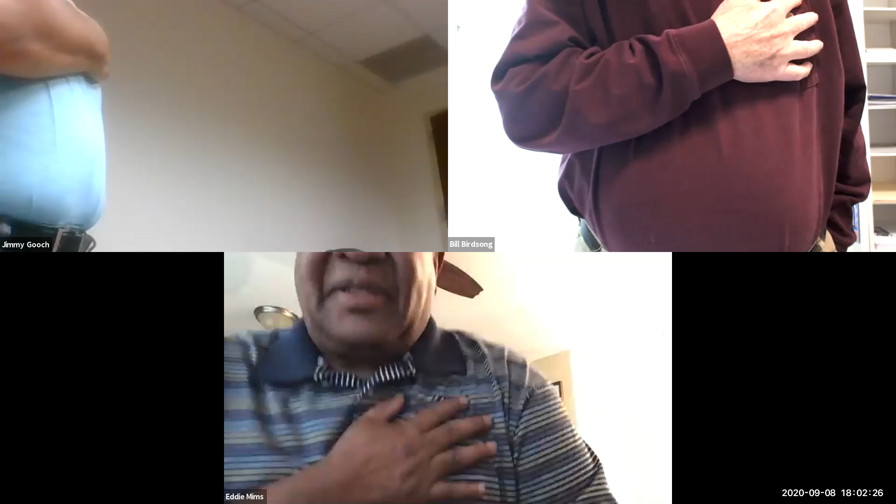Amen. Thank you. And Mr. Birdsong, will you lead us in the Pledge of Allegiance? Be glad to. Please join me in the pledge. I pledge allegiance to the flag of the United States of America and to the republic for which it stands, one nation, under God, indivisible, with liberty and justice for all.

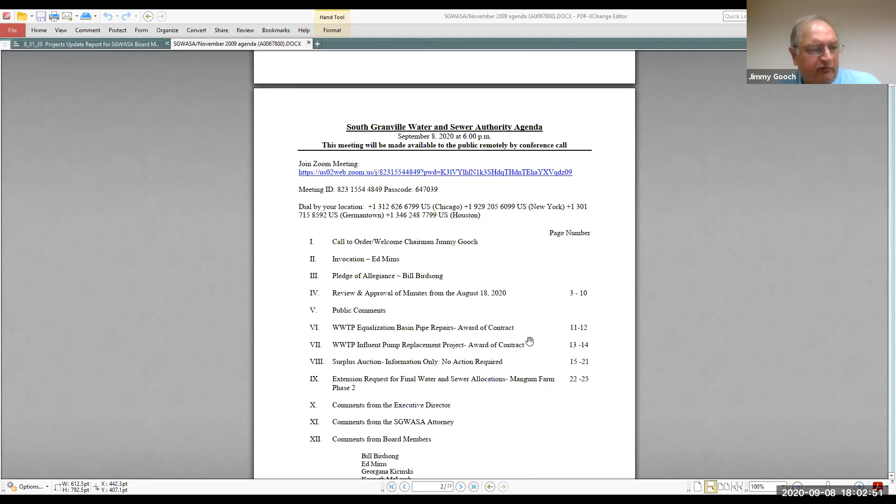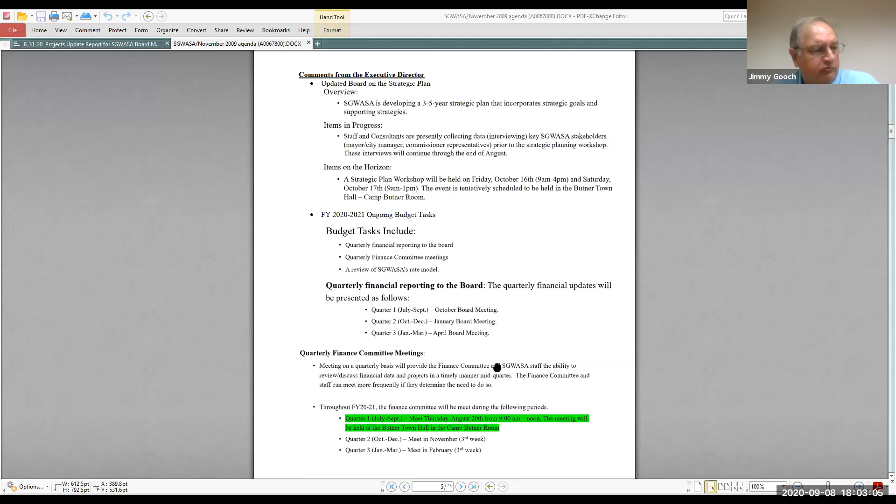Thank you. And now our next item of business is review and approval of minutes from the August 18th meeting. Do I hear any comments? I make a motion that we approve the minutes from the August 18th meeting. We have a motion from Commissioner Kicinski to approve it. Second. I'll second. Okay, we have two seconds. Mr. Birdsong chimed in first, so we have a second from Mr. Birdsong. And Ms. Mercer, will you do a roll call vote for us, please?

Yes. Chairman Jimmy Gooch, yes. Mr. Bill Birdsong, approved. Mr. Ed Mims, aye. Ms. Georgeana Kicinski, aye. Mr. Tim Karen, aye. And I think that's all that's present. Yes, thank you. So the motion carries.

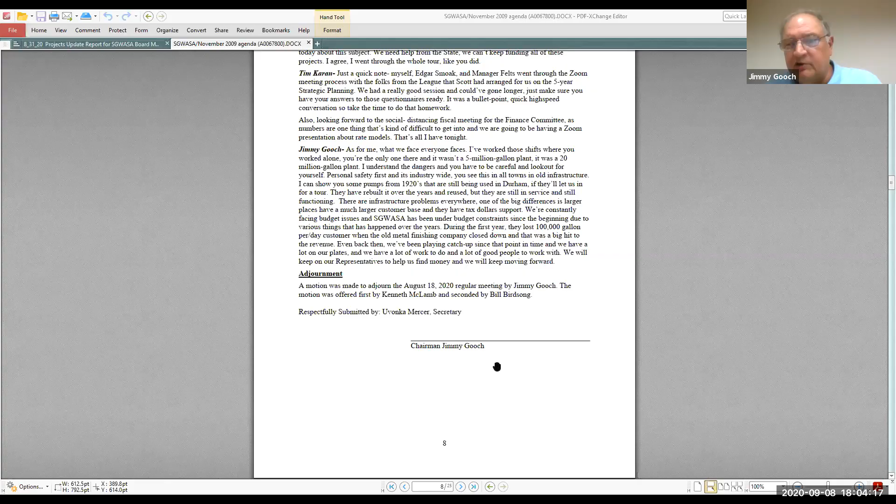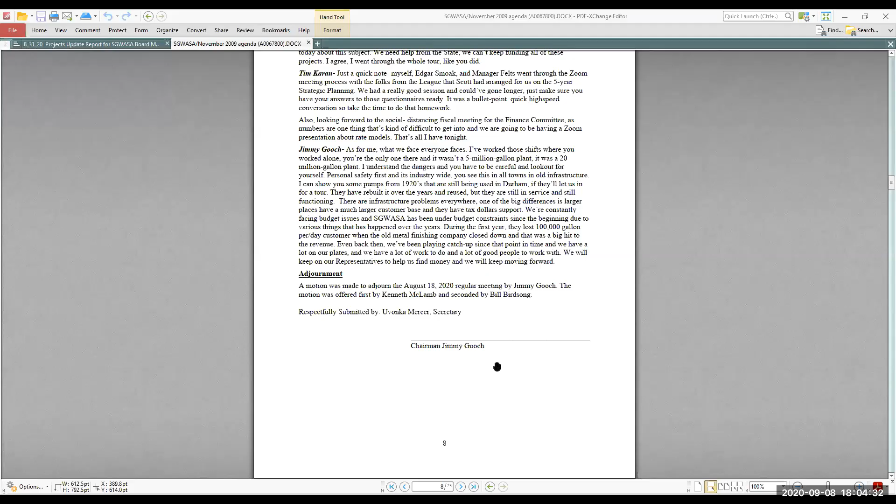Mr. Kenneth McLamb is here now, but I did not hear what we were voting on. We were voting on approval of the minutes from the August 18th meeting. I agree. Okay, thank you. I'm glad you could join us. Thank you. I understand you're still at work, so. I'm on my phone, but I can listen. Okay, good deal. Thank you, Kenneth. We appreciate that.

And now we'll open the floor for public comments for anyone that would like to make a comment at this time. Anyone from the public that would like to make a comment, please speak up. Okay, I don't see anyone unmuting their microphone, or any motion to make a public comment. So we'll close public comments and move on to, I'm sorry, did I miss something?

If not, we'll move on to item 6 on our agenda, the wastewater treatment plant equalization basin pipe repairs, the award of contract. Mr. Schroy, could you lead us through this, please? I sure will. Thank you, Mr. Chairman. This is the wastewater treatment plant equalization basin pipe repair project award of contract. So just some background information for you. The South Granville Water and Sewer Authority FY 2021 approved budget includes $234,000 for repairs and maintenance of equipment at the SGWASA wastewater treatment facility.

The focus of this project is on our equalization basins and some pipe repairs within one of the basins. The wastewater treatment facility has two 2.5 million gallon storage tanks on site that are used as flow storage and equalization for wastewater processing at the facility. The equalization basins are designed to provide consistent influent flow to downstream processes by retaining high flow fluctuations.

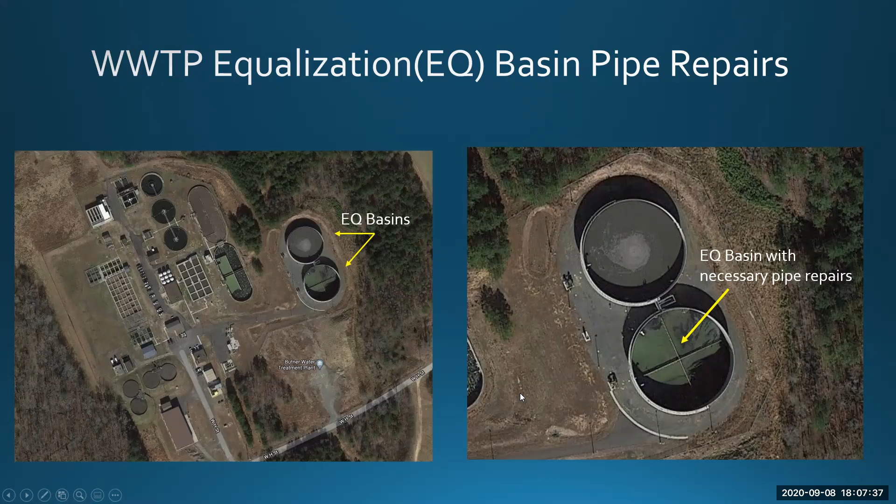So to give you a better snapshot of what's going on here, you can see in this view that inside the containers, we actually have these joint repairs on these pipe segments. And these are the items that need to be repaired throughout the basin. I hope it's very helpful for you to see from these images that what we're focusing on with this contract is repair to get this back into service.

So when procuring items using the informal bid procedures, SGWASA policy requires 3 competitive quotes on a vendor letterhead. And with the estimated cost of $20,000 for the repair work, SGWASA staff solicited informal bids. The following companies provided written proposals on their company letterhead: Fiber Basin Incorporated, proposed cost $14,000. Microfab Incorporated, proposed cost $15,138. And Augusta Fiberglass Incorporated, proposed cost of $16,250.

Following the review of the proposals submitted to SGWASA, SGWASA staff recommends awarding the fiberglass pipe repair project to Fiber Basin Incorporated. Following board approval, the work will commence to be completed within 45 days. In terms of the financials for this project, as mentioned previously, SGWASA's approved budget includes $234,000 for repairs and maintenance of the equipment at the wastewater treatment facility. Presently, $141,900 is available for projects.

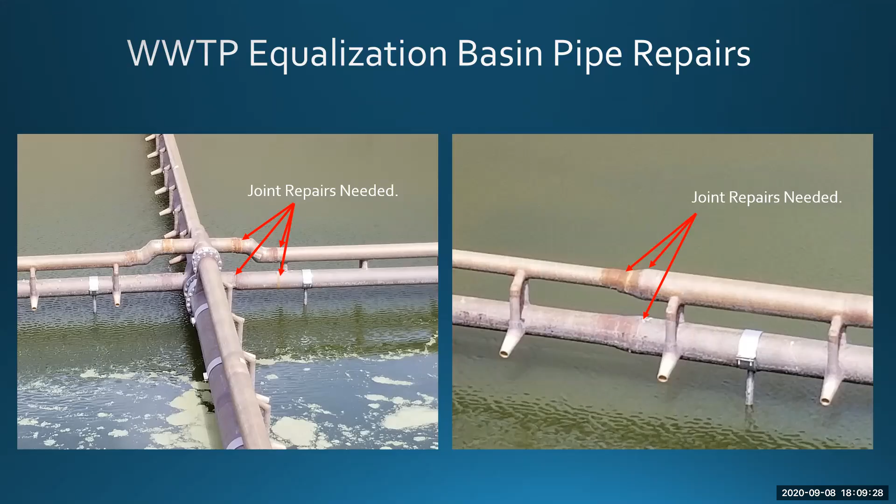As such, SGWASA staff is requesting authority to spend $15,400 on this item, which includes a 10% contingency of $1,400. So my recommendation is the SGWASA board approve the equalization basin pipe repair work to Fiber Basin Incorporated for the not to exceed amount of $15,400. Thank you, Mr. Chairman. Thank you.

Do we have any discussion? If there's no discussion, then do I hear a motion? Mr. Chair? Yes, Mr. Mims? Yes, I move that SGWASA award the equalization basin pipe repair work to Fiber Basin Inc. for the not to exceed amount of $15,400. Thank you for the motion. Is there any discussion on the motion? If not, do I hear a second? Second. Second from Commissioner Kicinski. And Ms. Mercer, will you do a roll call vote for us, please?

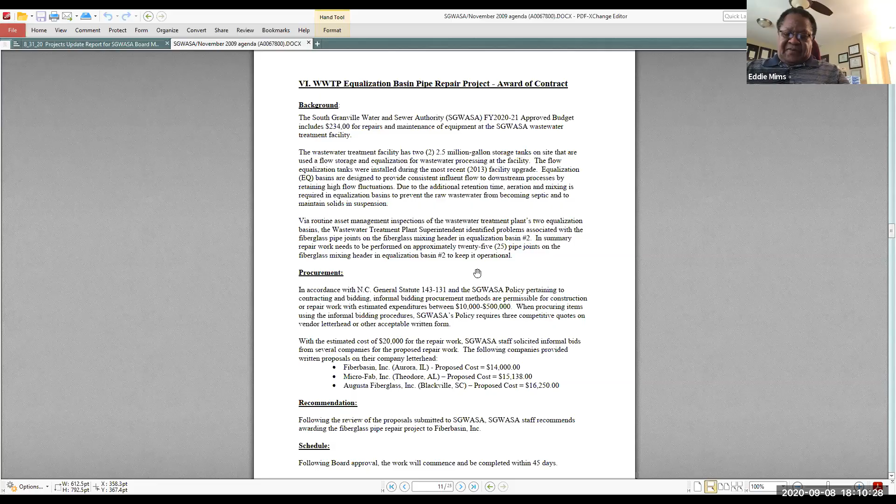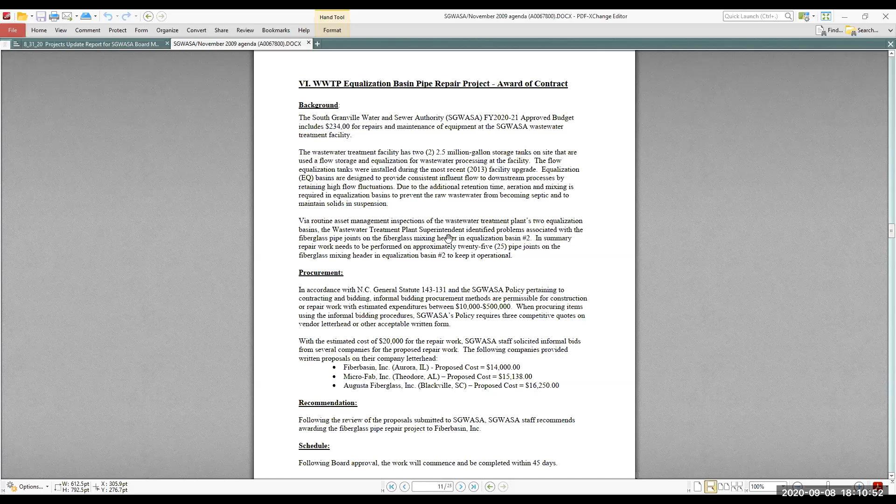Sure. Mr. Ed Mims, aye. Mr. Bill Birdsong, approved. Ms. Georgeana Kicinski, yes. Mr. Kenneth McLeod, yes. Mr. Tim Karen, yes. And Chairman Jimmy Gooch. Yes. So the project is approved, award of the contract rather is approved unanimously. Can't even talk tonight.

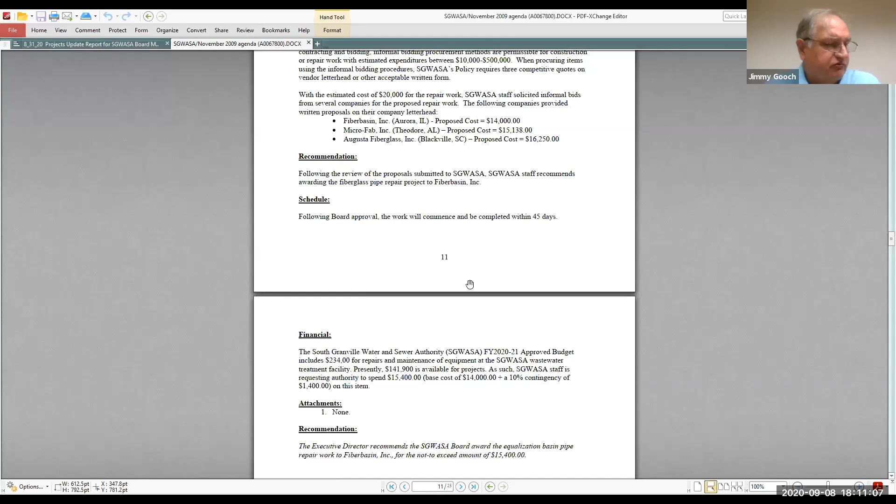And we'll move on to item 7, which is the wastewater treatment plant influent pump replacement project, award of contract on that. Thank you. Mr. Troy, would you lead us through this, please? I sure will. Thank you, Mr. Chairman. The SGWASA FY2020-21 approved budget included $55,000 for the rebuild or purchase of one existing pump in the influent pump station at the South Granville Water and Sewer Authority wastewater treatment facility. The influent pump station includes 3 pumps.

As part of the routine scheduled maintenance that is performed on the existing assets at the wastewater treatment plant, one of the 3 influent pump station pumps was replaced with new last year, fiscal year 2019-20, at a cost of $52,236, while a second pump is scheduled for replacement this fiscal year. In terms of procurement, when procuring items using the informal bidding process, SGWASA's policy requires 3 competitive quotes on vendor letterhead. The new pump type and manufacturer that SGWASA is recommending for purchase comes from a vendor who's identified by SGWASA as a sole source vendor. This was the same for last year's pump purchase.

Therefore, the following sole source company provided SGWASA with a written proposal on their company letterhead for the installation of one new pump, and that was Charles R. Underwood Incorporated, Sanford, North Carolina, proposed cost $53,236. In terms of the recommendations, SGWASA staff recommends the board approve the purchase and installation of the new pump from Charles Underwood Incorporated, the sole source vendor. In terms of our schedule, following board approval, this item will be purchased and installed within the next 60 days.

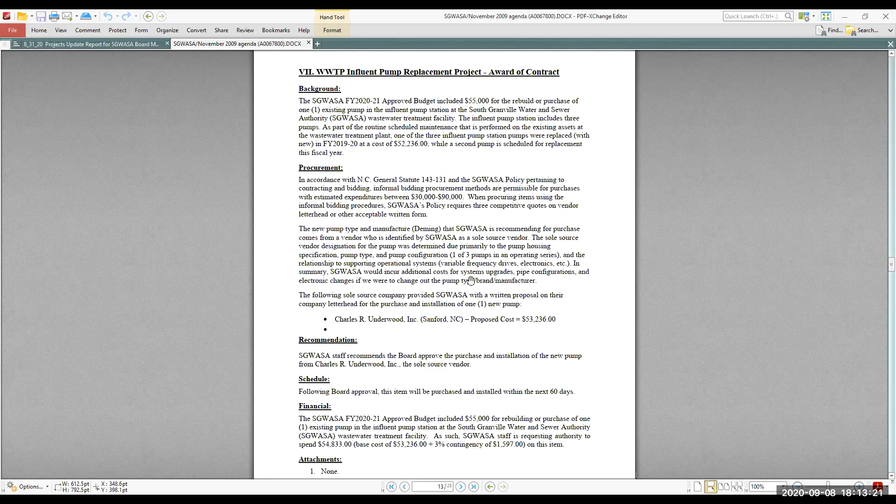Thank you, Mr. Troy. Are there any questions or any comments? No pictures this time? No pictures. Scott, do you know if there's a brand name on that pump? The pump type and manufacturer we're calling out is Deming, D-E-M-I-N-G. Okay, thank you. You're welcome.

Mr. Chair? Yes, please. Yes, Mr. Mayor. Yes, Mr. Troy, I was just curious, since the amount budgeted was $55K, and you asked for something less than that, not much less, but something less than that. I guess your level of confidence that the contingency only needs to be 3% is pretty high. Would you concur with that?

That my contingency is high? Is that correct? Your contingency only needs to be 3%. Yeah, exactly. This company has performed very well for us in the past. And as you can see, there was a slight increase in the price over last year's price for this. And we have a very detailed proposal working with this vendor.

And we always like just a little bit of contingency, if you will, just in case something needs to be done in addition. And that takes us right up to the budget amount without going over. So we're trying to be fiscally responsible as well. And of course, we will not spend that contingency if we do not need it. Thank you, Mr. Chair.

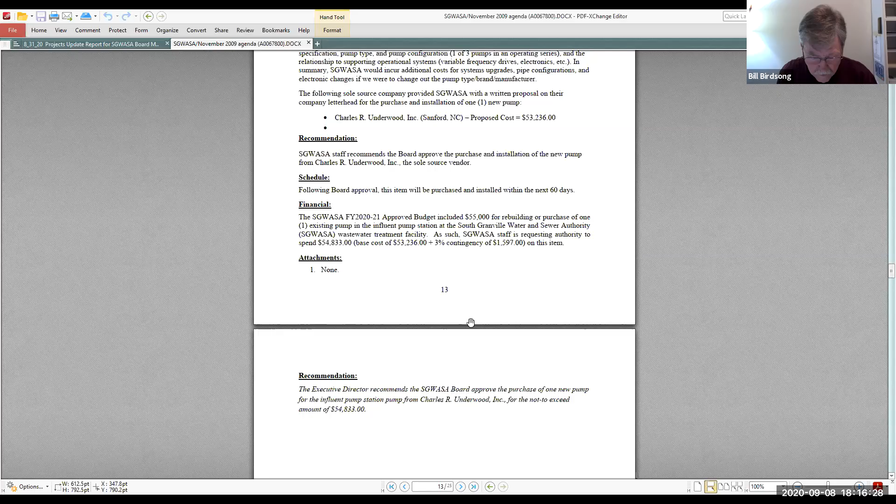Any other questions, comments? If not, do I hear a motion? Yeah, motion to approve. Go ahead. I stated my name, Tim Karen, motion for approval. Okay, Tim slipped in and made the motion then. Do I hear a second? Second. Okay, we have a second from Mr. McLam. So we have a motion and a second.

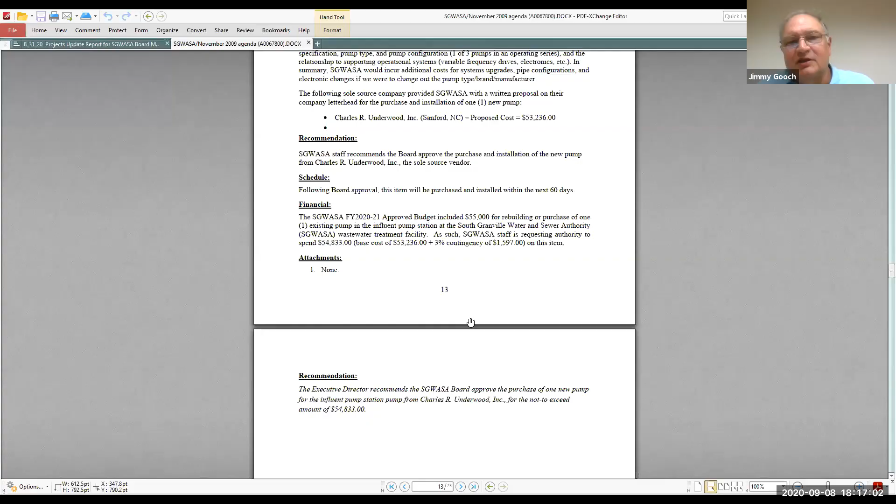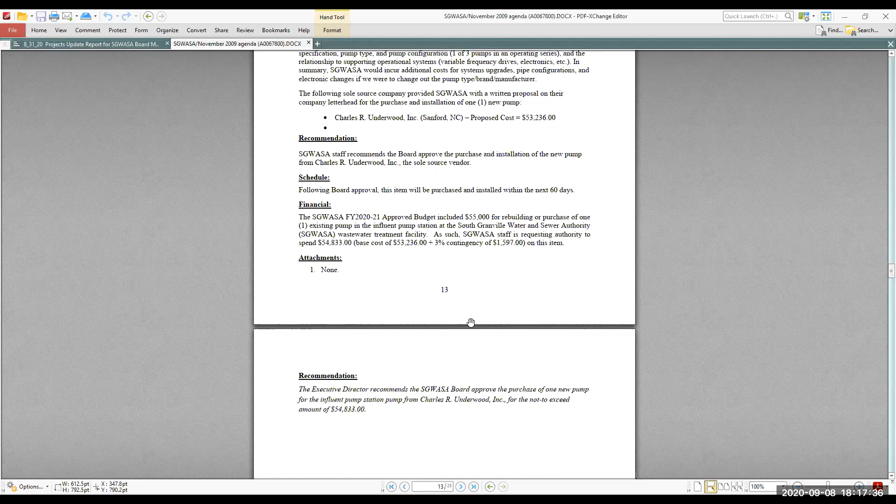Good, Ms. Mercer, will you do a roll call vote for us, please? Sure. Ms. Georgina Kaczynski, yes. Mr. Ed Mims, aye. Mr. Bill Birdsong, approved. Mr. Tim Karen, yes. Mr. Kenneth McLam, yes. And Chairman Jimmy Gooch. Yes. So we have a unanimous vote.

The motion passes. And we move on to item number 8, surplus auction. This is information only, no action required. That is Mr. Troy, correct? Yes, thank you, Mr. Chairman. I'll continue with this item if that's okay. Yes, please. Thank you. So just some background. In 2009, SGWASA Board passed a resolution authorizing the authority to enter into a seller's agreement with GovDeals for disposal of surplus personal property via the vendor's online auction software.

So in accordance with the provisions of the board-approved administrative procedures governing the disposal of property, the executive director has identified several items, vehicles, and other assets that are being declared surplus. The list of the surplus property has been attached to the agenda and is found below. The executive director has determined minimum bid values for all surplus items, and will coordinate with the finance director to schedule a public auction on GovDeals later this fall.

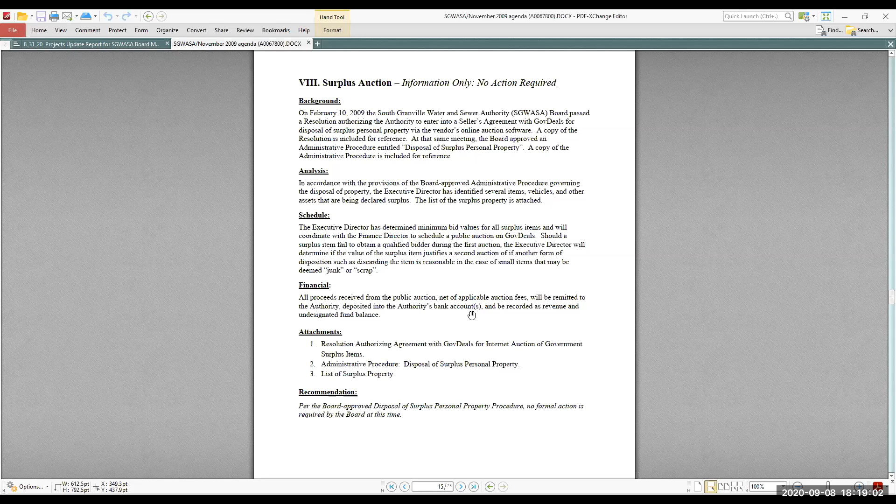All proceeds received from the public auction, net of applicable auction fees, will be remitted to the authority. I've attached for you the original resolution, the administrative procedure, as well as the list of surplus property. And again, per the board-approved disposal of surplus personal property procedure, no formal action is required by the board at this time. Thank you, Mr. Chair. Thank you. Are there any comments or discussion?

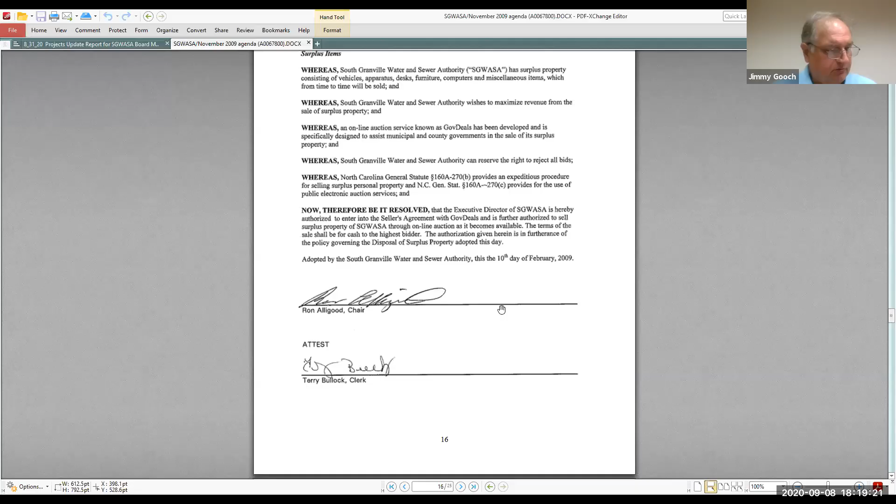If not, we'll move on to item number 9, the extension request for final water and sewer allocations for the Mangum Farm Phase 2. Mr. Troy, will you help us with this, lead us through it? I sure will. Thank you, Mr. Chairman. Okay, a lot of detail in this. So it's worth kind of taking our time just to walk through this as far as the extension request.

So the Mangum Farm subdivision located in Stem was proposed as a 2-phase construction project back in 2006. And it was proposed as a 245 home subdivision. Phase 1 construction was completed and includes 78 homes, whereas Phase 2, proposed at 167 homes, has not been started. In terms of the allocations for water and sewer for this subdivision, the total final allocation approved for the entire subdivision, both phases, is 92,880 gallons per day.

In terms of the status of the total allocations, Phase 1 consumes just over 32,000 gallons per day, which leaves a balance of just over 60,000 gallons per day for Phase 2. At the March 14th, 2017 SGWASA Board meeting, the board approved with conditions a 3-year extension, expiring October 11th, 2020, for the final water and sewer allocations of 60,120 gallons per day of residential water and sewer for the Mangum Farm Subdivision Phase 2 project. The 3-year extension granted by the board on March 14th, 2017 represented the third extension since the original allocation approval in October of 2006.

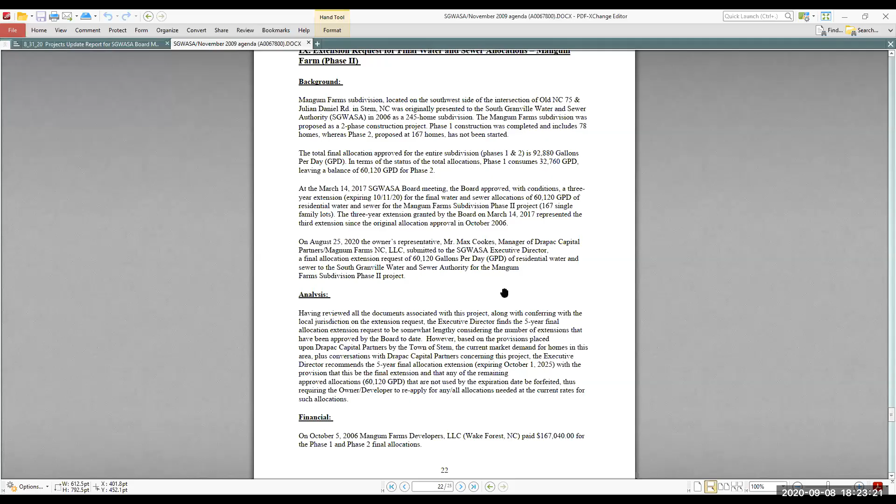Therefore, my recommendation to the board is that the SGWASA board extend the deadline to October 1st, 2025 for the final allocation of 60,120 gallons per day for residential water and sewer for the Mangum Farm Subdivision Phase 2, with the conditions as noted on the letter dated 3/15/17, including the provision that this be the final extension, and that any of the remaining approved allocations not used by the expiration date be forfeited, thus requiring the owner to reapply for any and all allocations needed at the current rates for such allocations.

Thank you, Mr. Chairman. Thank you, Mr. Troy. Do we have any comments or concerns or questions from the board members? Mr. Chairman, I have a question. Yes, Commissioner Kicinski, go right ahead.

So I see that on the document that's in our agenda, item number 9, extension request, it talks about phase 2 having a proposed 167 homes. But in the March 15, 2017 document, it says 165 single-family lots on phase 2. And in the Drapac document from August 25th, 2020, it is for 165 homes. I'd like to know which one is it, 167 or 165? It's the lower amount. Okay, thank you. You're welcome.

Any other questions, comments? Mr. Chair. Yes, Mr. Mims. Yes, I'd just like to ask Board Member McLam, does he see any issues that might impact this subdivision? I do not. The board has approved it. Okay. Thank you. Any other discussion, comments, concerns? If not, do I hear a motion on this? Motion to approve.

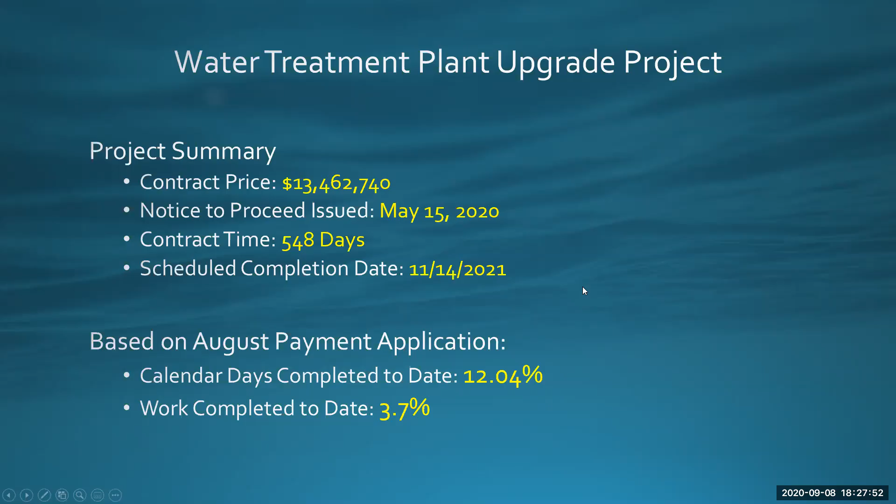Okay, so just an overview. I always like to start off with an overview of the project summary. As you can see, our contracted price is over $13 million. Our notice to proceed was issued in May of this year, and our scheduled completion date is coming up in November of 2021. Based on the August payment application, we've completed about 12% of calendar days, and work completed to date is about 3.7%. I like to keep in mind all the improvements we're doing to the water treatment plant, and as you see, those are highlighted in yellow. And this is a call out just to show you again all the things we're working on in this project.

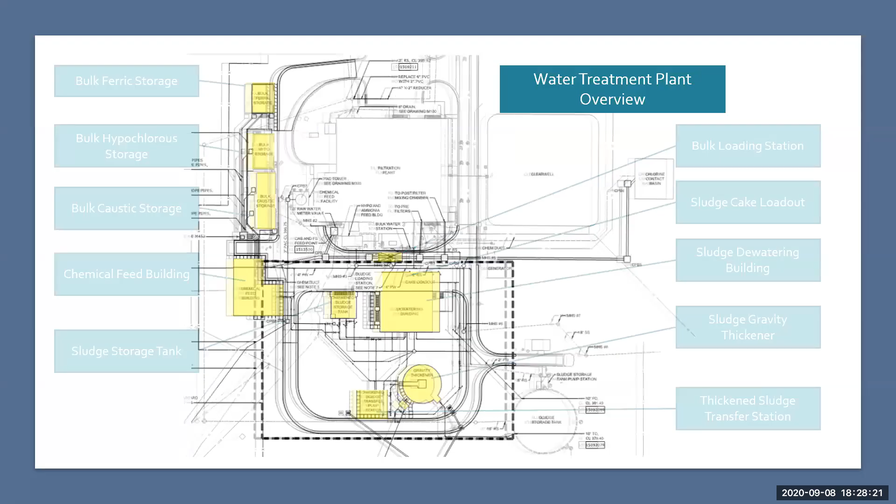And on the next screen, I will drill down to the areas that we have currently under construction, making progress on. So we have our bulk ferric storage area, our chemical feed building, the gravity thickener, and the thickened sludge storage tank. So since our last update, we've had work done on the thickened sludge storage tank. In addition to that, we're just doing more and more with these facilities. And I'm very pleased with the progress that we're making. And you'll see the difference here coming up as we go through each one of these items, just to give you a glimpse of what's going on with each item, and then some videos just to show you the overall view.

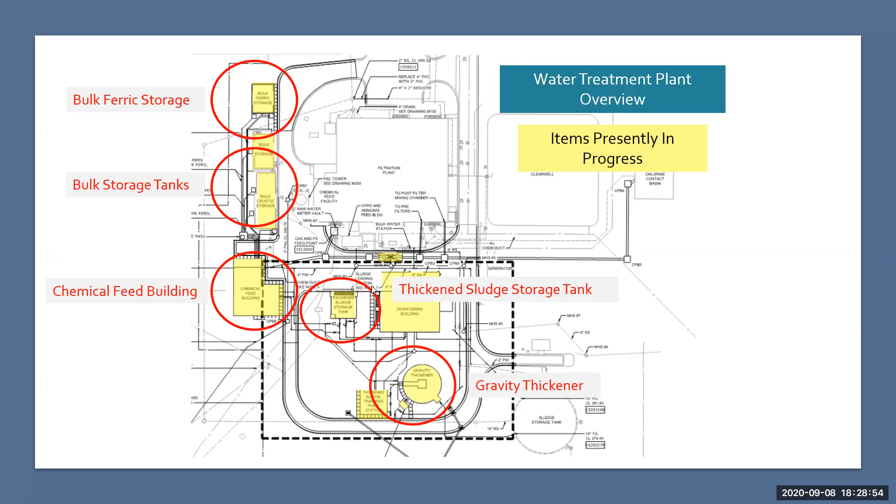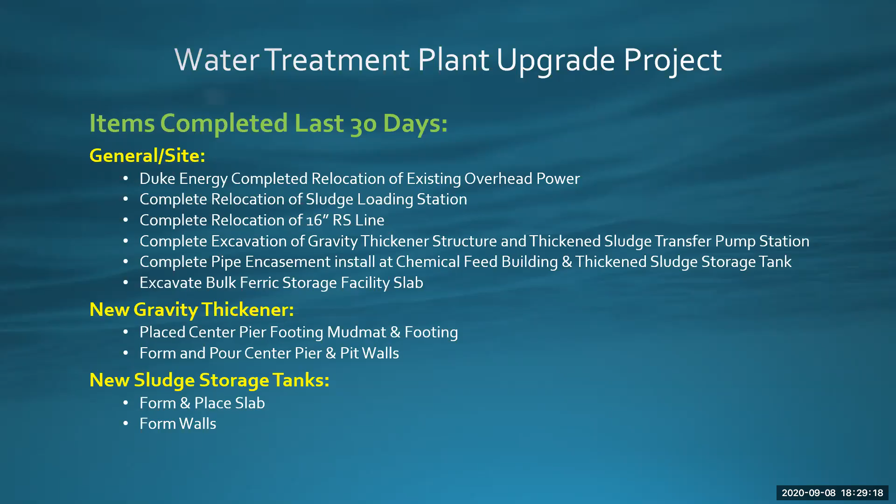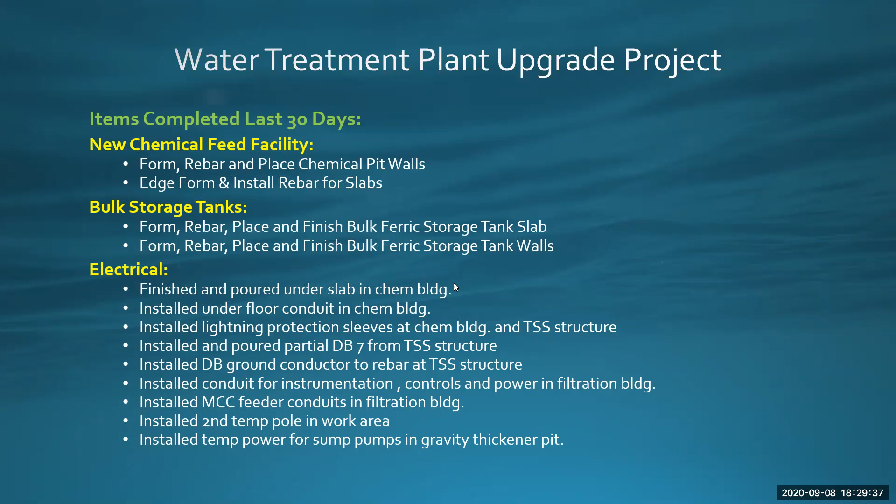The things that we've completed in the last 30 days, and we're starting to get a longer and longer list here. As you can see, we have some general site items. We did some relocation of some existing overhead power lines. We have the new gravity thickener process moving forward with that. We have the new sludge storage tanks. We have work going on our chemical feed facility, the bulk storage tanks, and a lot of electrical work going in and around the foundations and underground to these facilities. This list will get longer and longer over time, which is great. We've got a lot going on at that site, and we've had some great weather.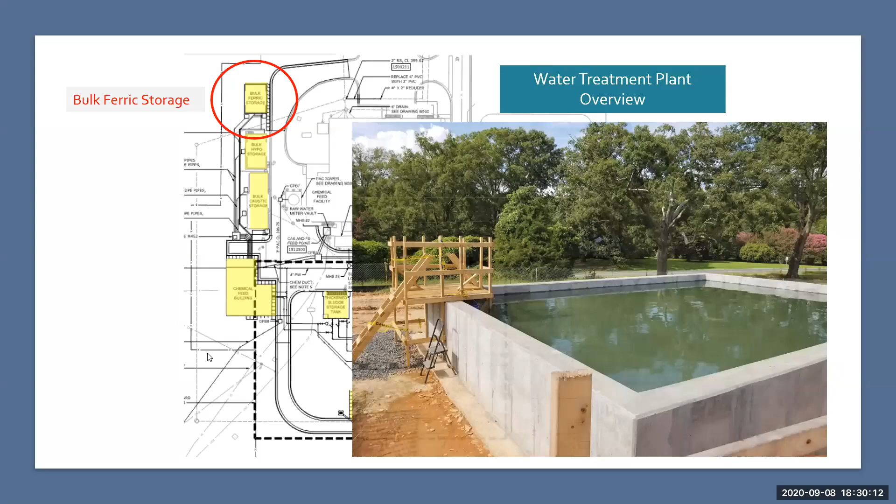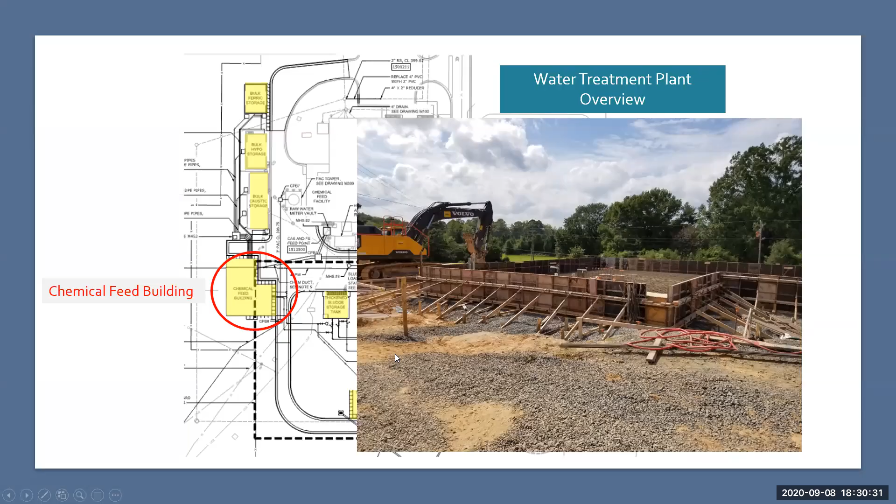The chemical feed building. You'll see some progress here. Last month we showed you, you could just barely see what was going on in terms of the rebar that was going in the foundation. And you can see that they have a lot of the walls formed for this foundation, and they're making great progress on this facility. On the next slide, I'll just show you a little bit different detail in terms of a video, just a short video.

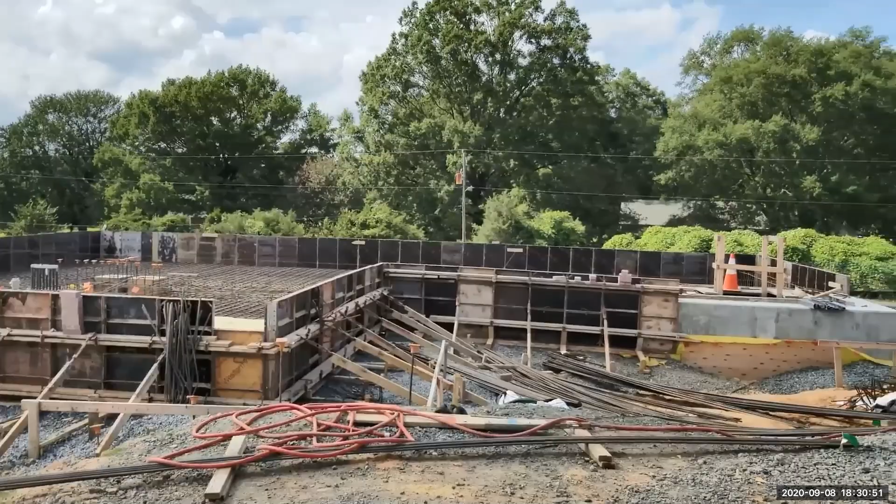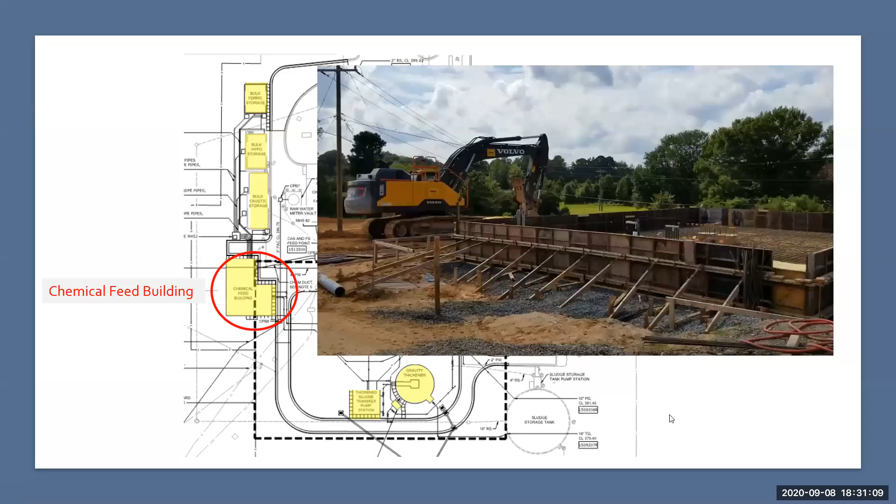Next item we have is the thickened sludge storage tank. Now this has just been built since our last update last month. And you can see that's quite a large facility that they've just constructed and poured in the last week or so with concrete. Quite a large storage tank.

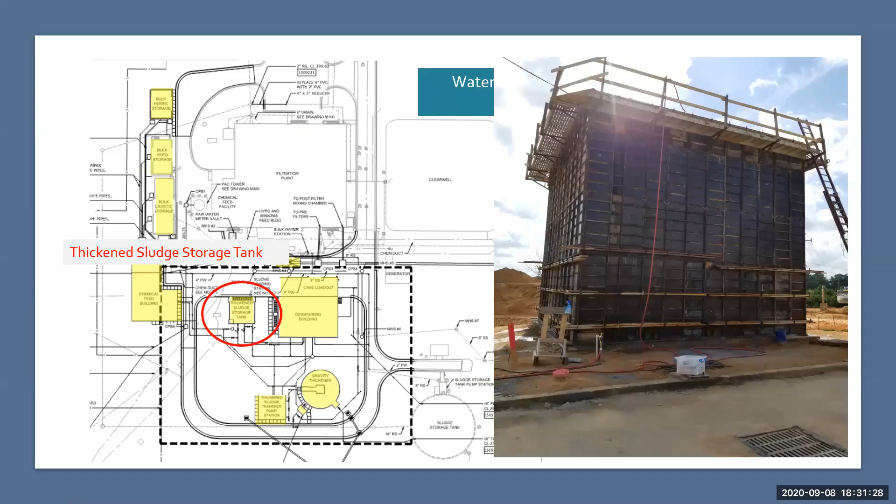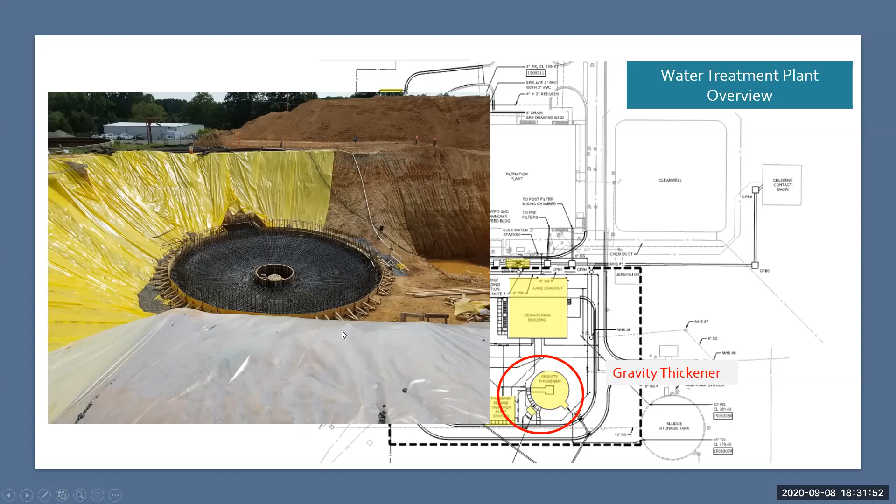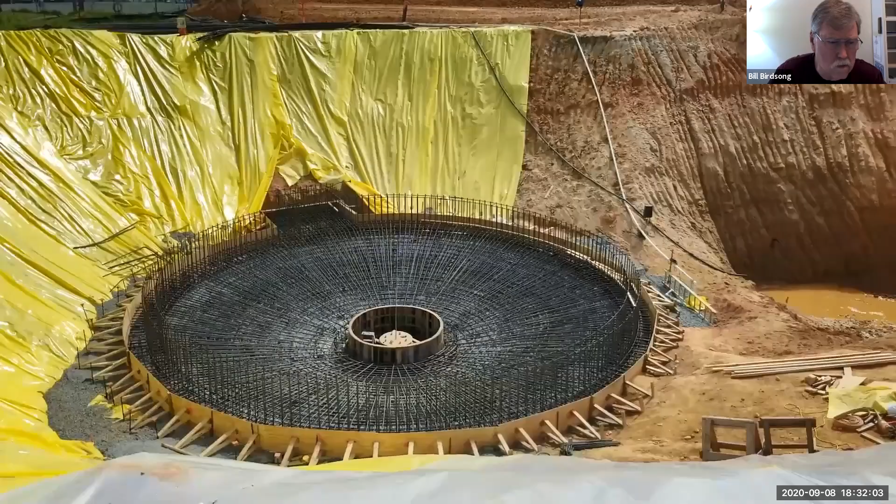All right, the next item is the gravity thickener. Last month we showed you a large hole in the ground, and now you can actually see where we have it formed up for concrete pour and all the rebar associated with it. Now on the next screen, I'll just give you a video of that same area so that you can appreciate the scale and depth. Oops, let me get out of that.

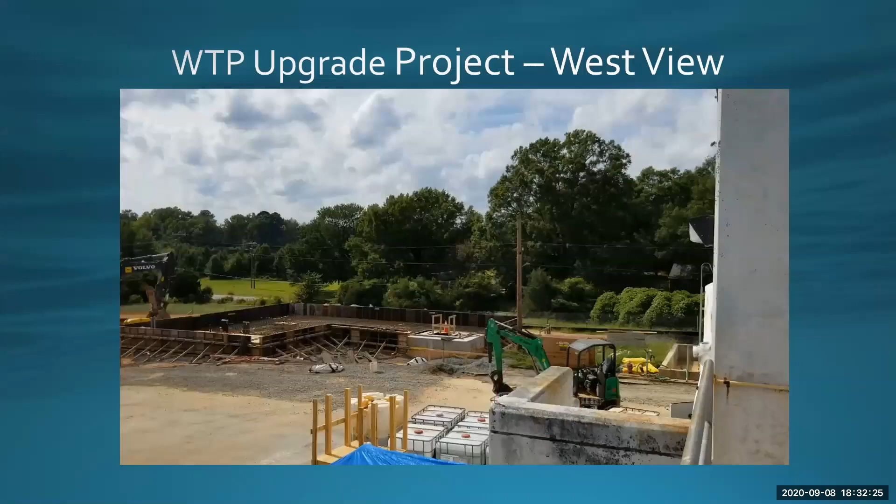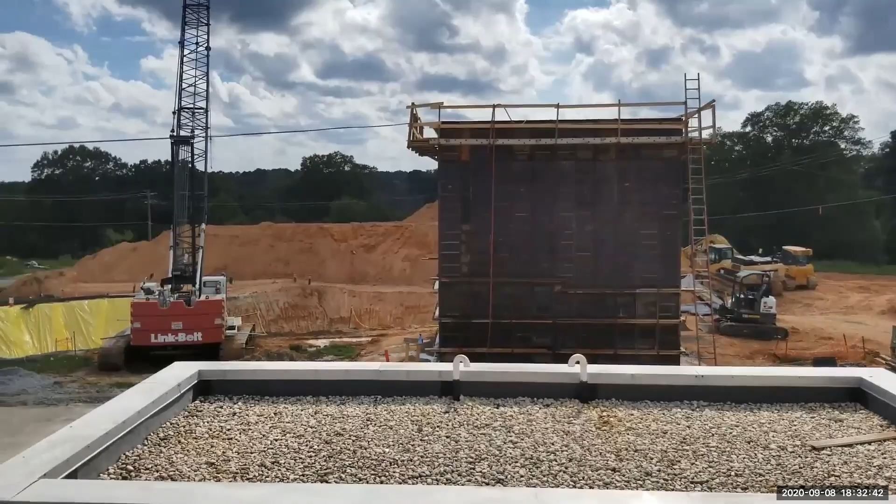And then finally, just an overall vista of a video here, just showing you what we're looking at in terms of looking west on the project, incorporating a video of some of the features that I just showed you in previous shots. Again, just to help you appreciate all that's going on at our facility. And all this work is continuing while we are actually working at the water treatment plant on a daily basis.

All right, thank you, Mr. Chairman. Thank you, Mr. Schroyer. Entertain any comments or questions by the board members at this time regarding that project? Mr. Mims. Amazed at the progress since I was there on August 25th. That hole was just a hole in the ground, and all these other walls and construction weren't even in my sight view at that point. They are making great progress.

Yes, Mr. Schroyer. Thank you so much for the photos and the video. That certainly gives us a true perspective. But I would like to ask you a question, and I'm not seeking an answer now. As a matter of fact, I think it will be appropriate to have an answer by the time we meet for our strategic planning towards the middle of October.

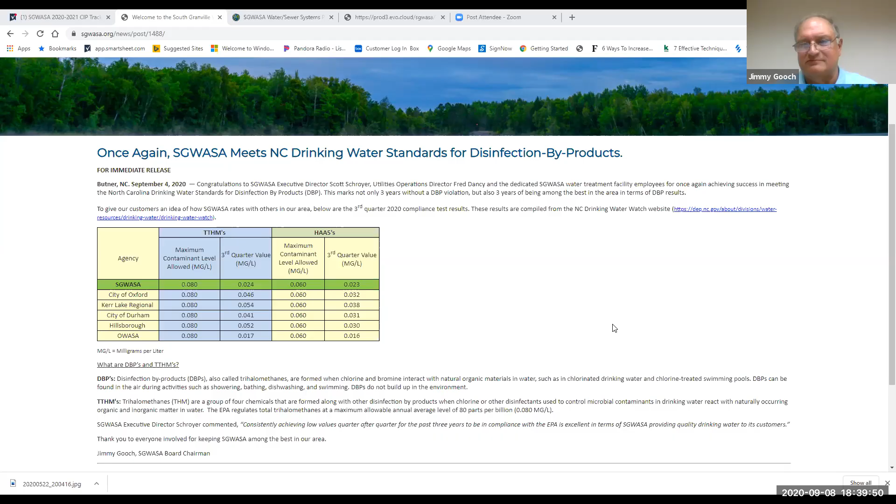If anybody wants to verify these numbers, they're welcome to. They're state numbers, they're not mine. It takes a while to compare them, but it's worth the time to see what we're doing versus what the people around us are doing, versus what common knowledge seems to be versus the facts. And with that, I see, Mr. Schroyer, you've put up some numbers here. Yes, sir.

If you'd like to look, what we have here is the third quarter numbers for the TTHMs and HAA5s. It shows SGWASA's third quarter was 0.024 off of 0.080, and the HAA5s was 0.023 off of a 0.060. And you can see how we compare to the city of Oxford, the Kerr Lake Regional System, the city of Durham, Hillsborough, and OWASA.

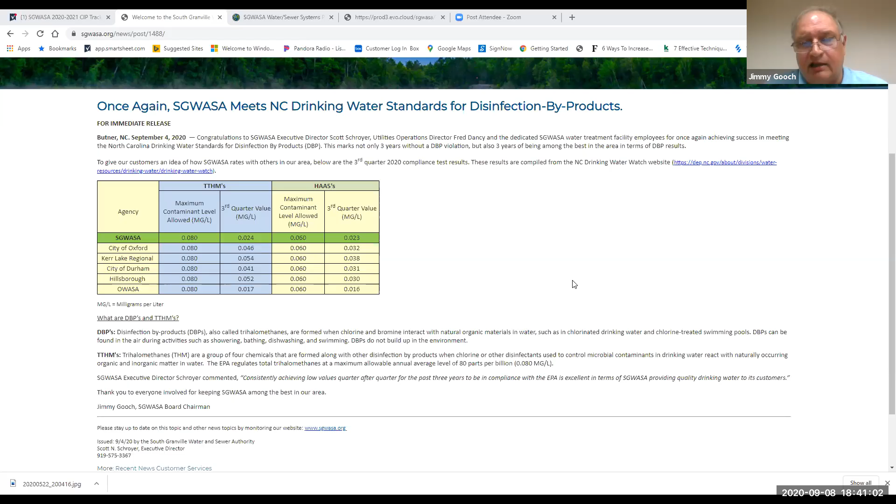So looking at our disinfection byproduct numbers, in spite of everything that's going on at the water plant, those guys are doing a fantastic job, and we appreciate all the hard work they do. They're running that plant manually. They're making hourly checks and adjustments accordingly, 24 hours a day, 7 days a week. And we appreciate all the hard work they're doing. Hats off to the SGWASA staff.

Thank you so much. And with that, if we don't have any further business to come before us tonight, no other comments or concerns, I'd entertain a motion to adjourn. Motion to adjourn. All right. I didn't catch which one said it first, but it looked like Mr. Mims said motion to adjourn. Mr. Birdsong, second. Okay, sorry, I apologize, Mr. McLam. But we have a motion and a second. Ms. Mercer, will you give us a roll call vote, please?

Yes. Mr. Kenneth McLam, yes. Mr. Tim Karen, yes. Ms. Georgiana Kaczynski, yes. Mr. Ed Mims, aye. Mr. Bill Birdsong, approved. And Chairman Jimmy Gooch. Approved. And with that, the motion carries and our meeting is adjourned.